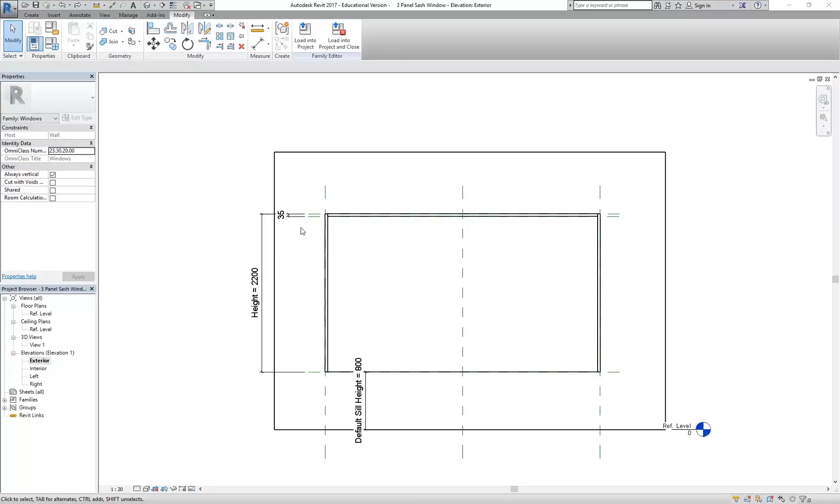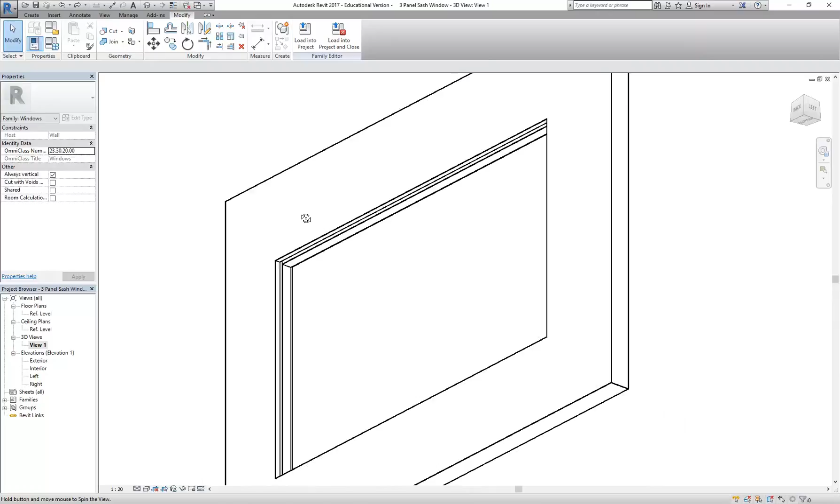Okay, so now I've made the three pieces that are essentially the same, or have the same profile, that is 35 mil in this view by 100 mil that we can see in plan. So the 100 mil is this way. And so looking at them in the 3D view, you can see that they're still reading as separate pieces. If you're worried that they should look like this and read as one piece, don't worry about that. We can make them join together afterwards using the join tool.

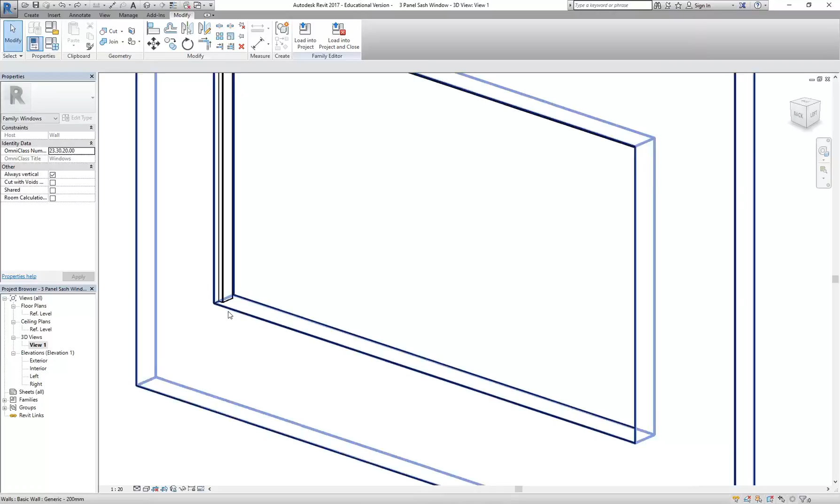But what I want to do next, though, is the sill, or the sill trimmer, or reveal, or trimmer really, and that's going to sit down here and stick out a little bit. I'm going to go back to my reference plane, the ref level floor plan. And you could do this even if you don't have the window head done. Actually, the order really doesn't matter as long as you've got the jambs. So I'm going to make an extrusion.

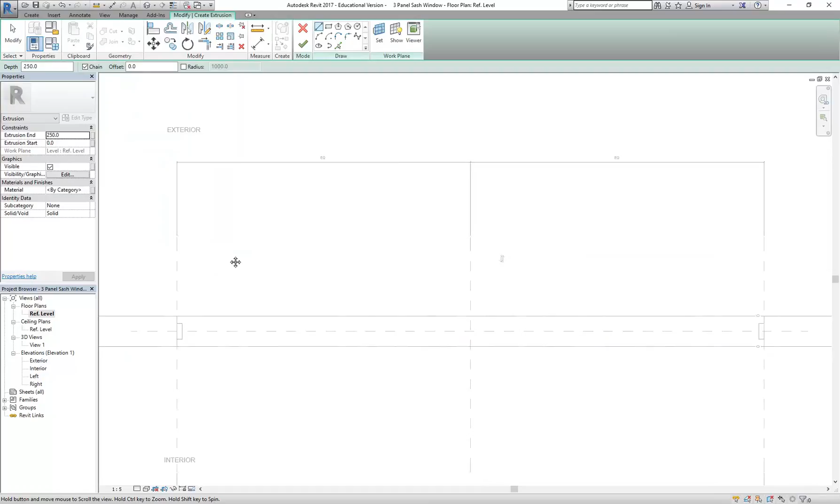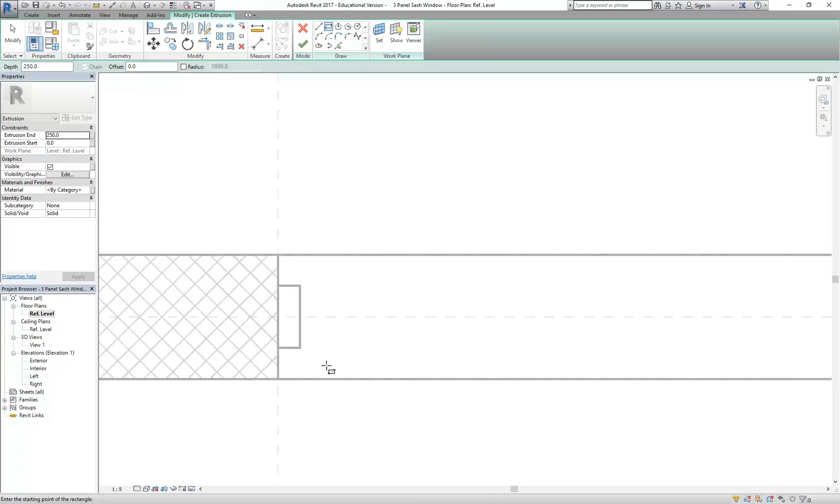And here it's a little bit more complex if you want to do it the right way, and I'm going to try to get you to do things the right way. Now you've got this piece here which really would sit under the window jambs, but I'm just going to make it overlap. So I'm going to draw a rectangle, the same way I did before, by clicking a point inside, and we'll bring over the other side this up and to the right. So again, it's inside the window jambs, just to make my aligning a bit clearer.

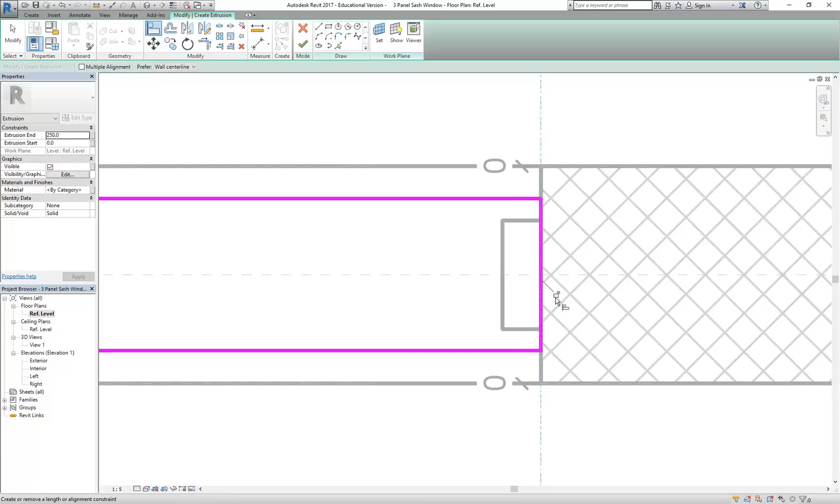So using the align tool, like I said, I'm going to make it overlap the jamb. So this time I'm going to use the reference plane on the side of the opening, and then pick the side of my rectangle, lock it. I'll do the same on the other side. Reference plane, edge of the rectangle, lock.

Now, looking in the plan view, how do we know which is the inside and which is the outside? Exactly, spot on. That's good if you spotted that. So yeah, they do tell you. If you zoom out, you'll see interior and exterior in your plan view. And Revit needs to know that, because you've got to establish which is the inside and which is the outside as you place your windows, because with a sash, for example, like this, the top needs to go on the outside. Or it'll leak, that's right.

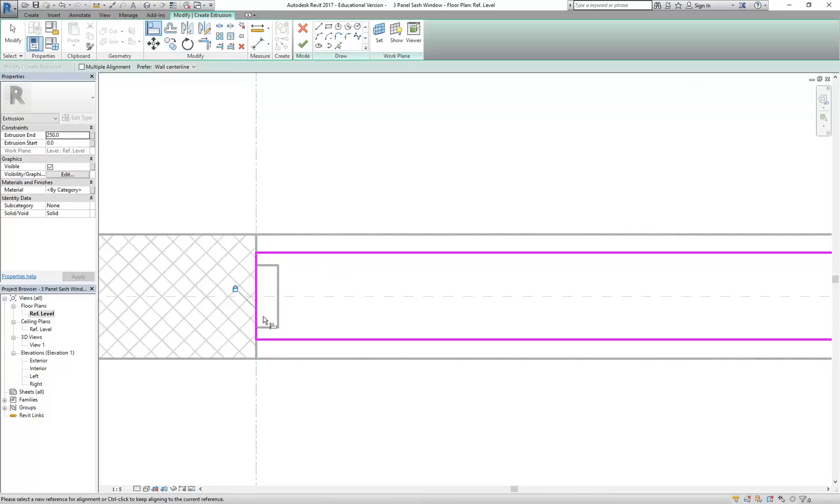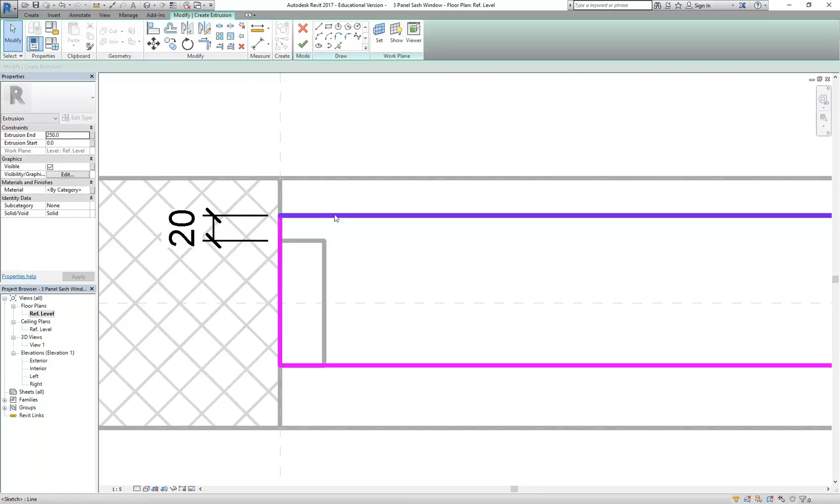So we want the sill to stick out on the exterior side. So I'm going to choose the bottom edge of the jamb and align that exactly. Lock it. But then I'm going to draw a dimension from the window jamb top to the edge of my sill, place it to one side. 20 mil is actually what I wanted, but if you need to change it, you can always select that line and change that dimension. Oh, and it's a bit off anyway, so I'll make it 20 by typing. Tick finish.

And now, sorry, what did I forget? I didn't lock it. So, not a problem. I can always edit extrusion, select the dimension, and then lock. Now, you might find that you forget to lock them, and it should follow that anyway. The locking really is just forcing it to keep that dimension, but usually if you draw a dimension in, it takes precedence over something that doesn't have a dimension.

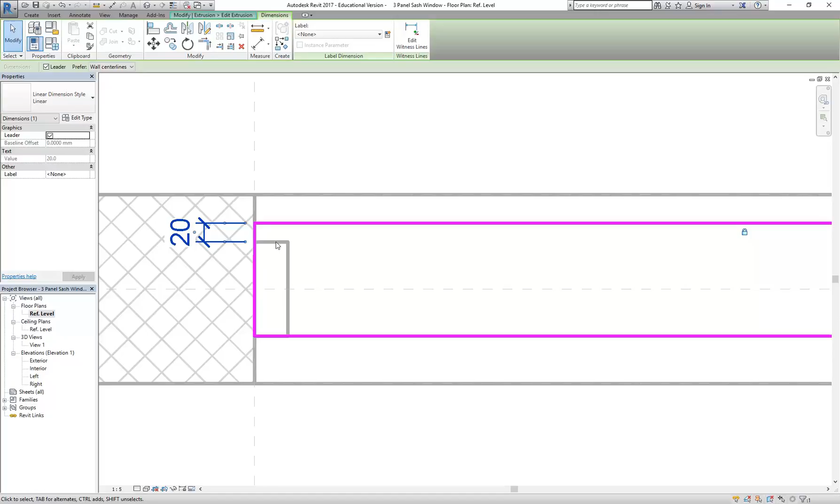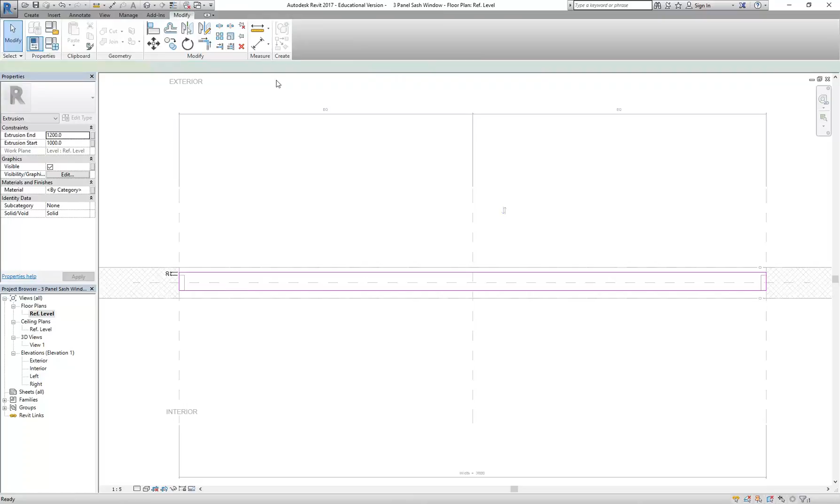So there's my piece, and I will, again, just put in a height in properties there, an extrusion start of, say, 1,000 and an end of, say, 1,200. These are just arbitrary values, so that when I finish it and look in a 3D view or the elevations, I can see it and it's not inside the wall. And then I'm sure you can work out the rest, because it's the same as the head.

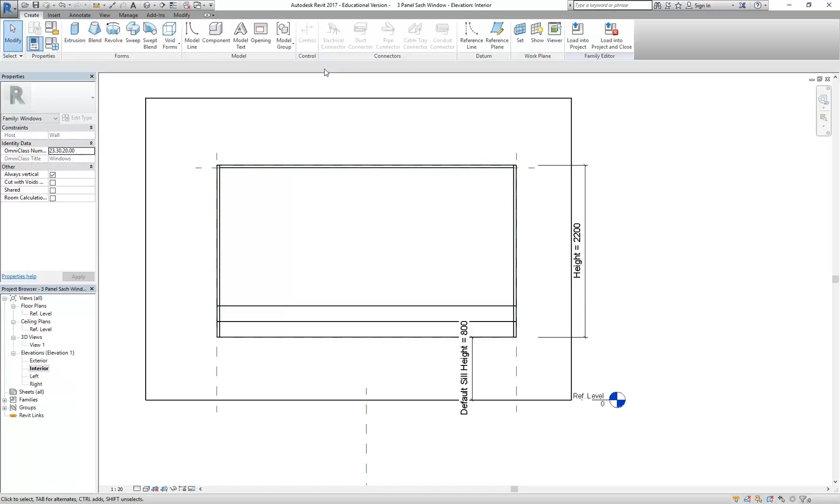I can lock the bottom to the window, but I need a reference plane just like I had up here. I'm going to draw a new reference plane over to the right. Make that, again, 20. Yeah, just because it's... Yeah, exactly. Yep. So you can see it there.

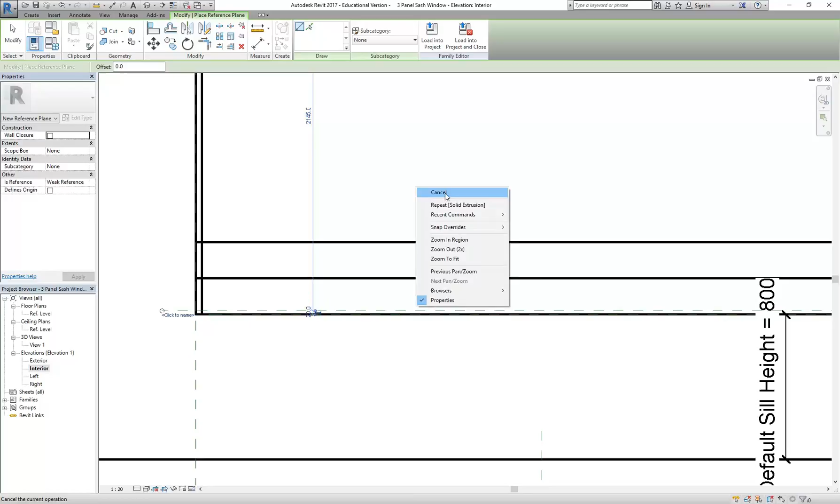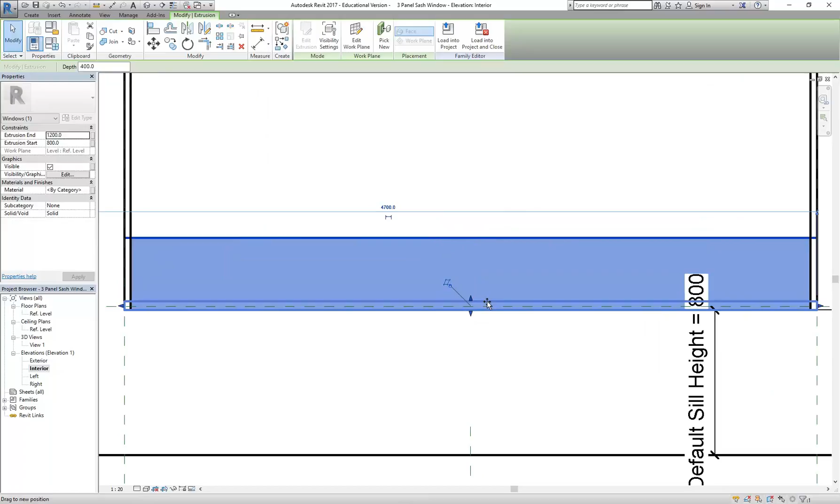Okay, and then, just like before, draw a dimension so that you can lock it. And then all you should need to do is click and drag the arrows on the extrusion to lock it to the edge of your opening, and of course to the reference plane. Lock it. So now go to the 3D view, and you can see there that doesn't look very good.

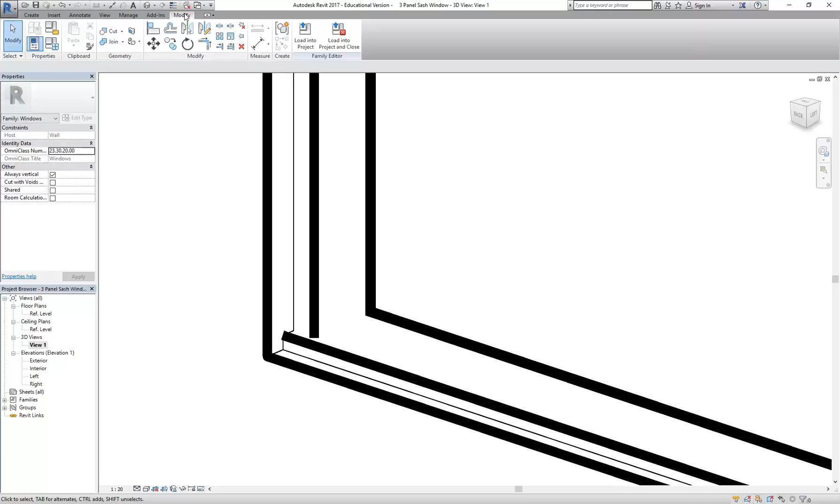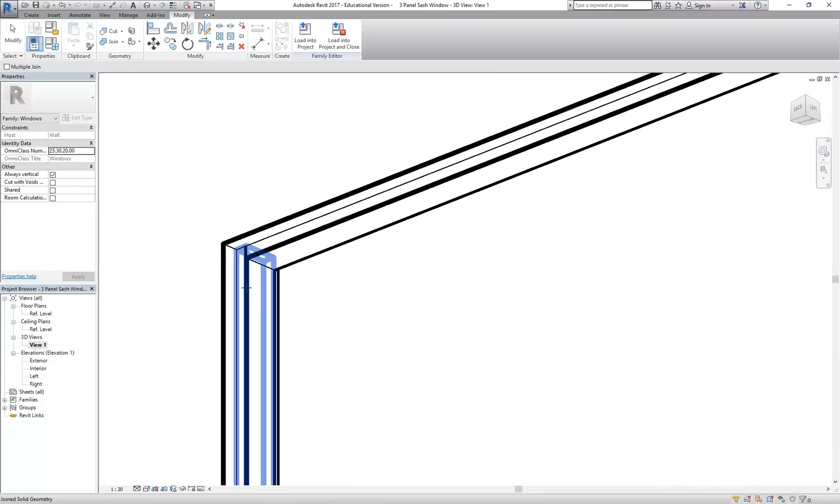So here you really should be looking at using join to clean up the graphics there. So that's what I'm going to do. So I'm going to, on the modify tab, oh yeah, two seconds, I'll come up in a sec. So I'm going to click the join tool, and then select the sill, and then the jamb. You can see that just cleans up all the joins. So same here, sill, and the jamb. And then at the top, we may as well, while we're at it, do the same thing with the jamb and then the head. Over here, it's already picked it up.

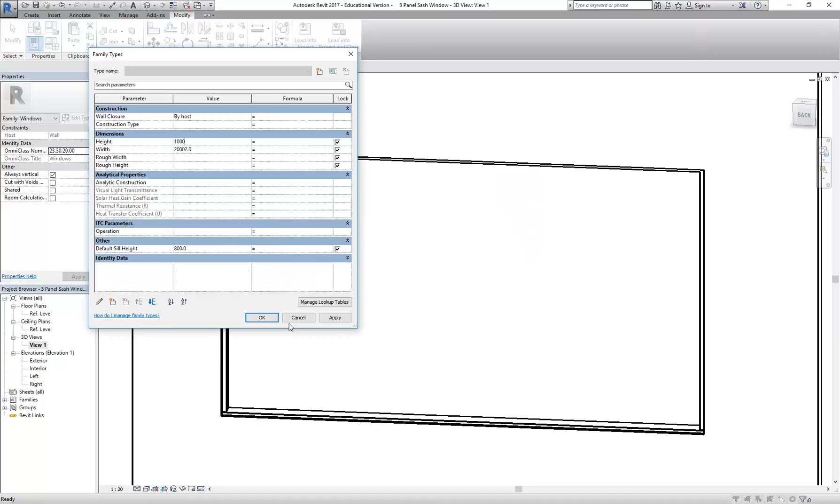So then what's the last thing to make sure it's all still working? Exactly, flexing. So I can flex, in other words, change these dimensions again. So let's try 2000 and 1000. Here we go. Remove constraints. Delete elements. Okay, so we've got a problem. Right, so that didn't work. So I'm going to undo and see where I went wrong.

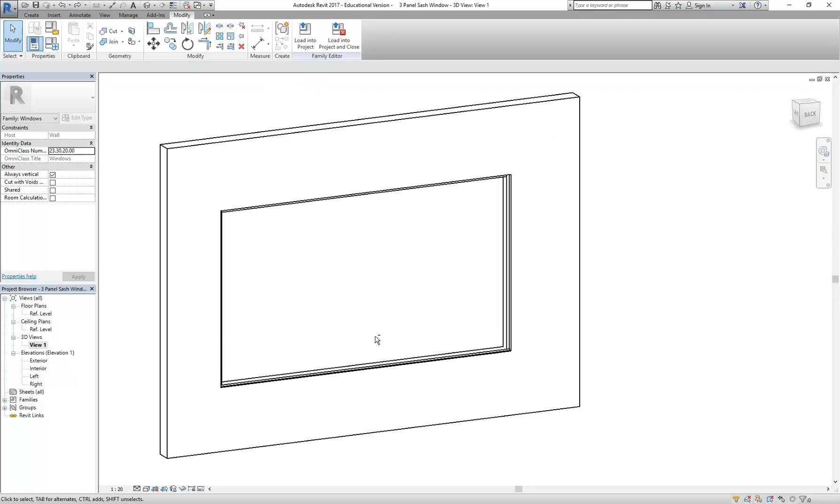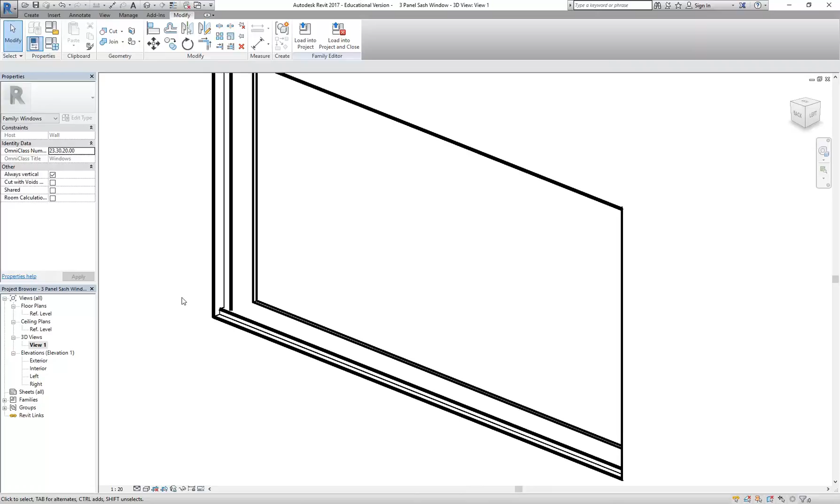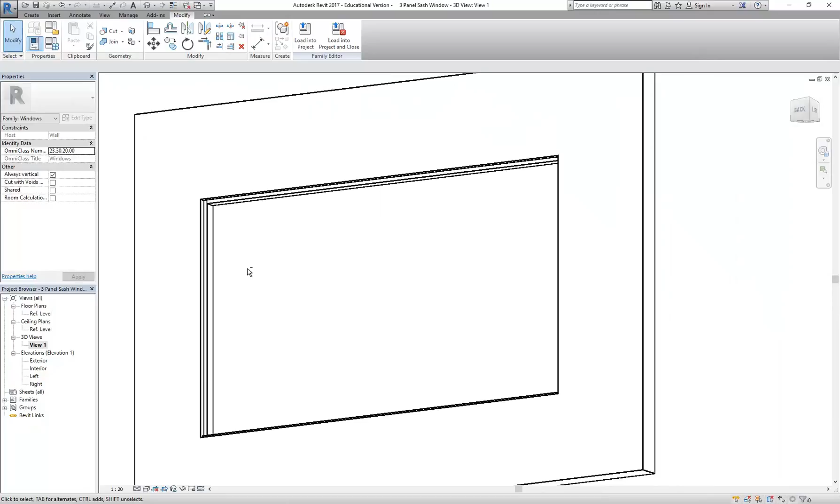So I've just undone the joining, and I'm going to go back and try flexing again. So I'll make that 2000 and 1000. Yep. Okay, so it was okay up until the join. So I'll do the bottom first. Try flexing again. 2200 and 3800. Yep. Okay, so it's up to that point. It's when I try to join the top to the jambs that it's got a problem.

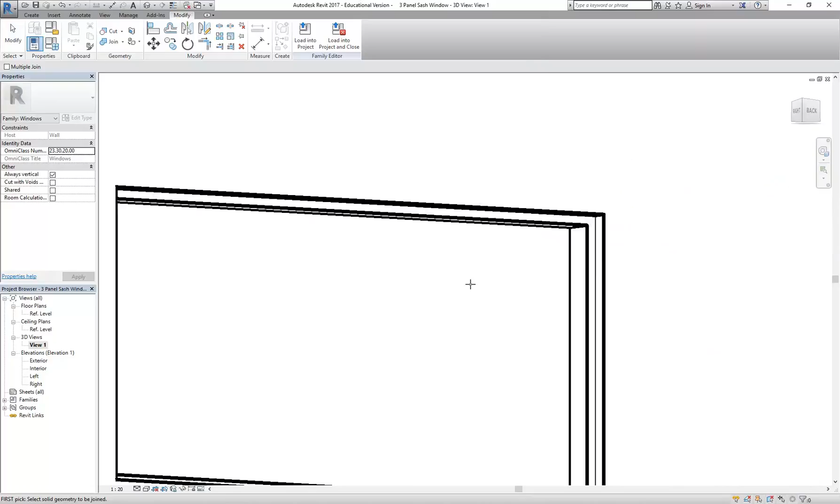So I'll just do that now. Also, I'll just try flexing again now. It may have just been a temporary error, which does happen. Yep, now it's working. Okay, so let's try the join. This is why you need to test it as you go along. So let's see. 3800 and 2200. Oh, now it's working.

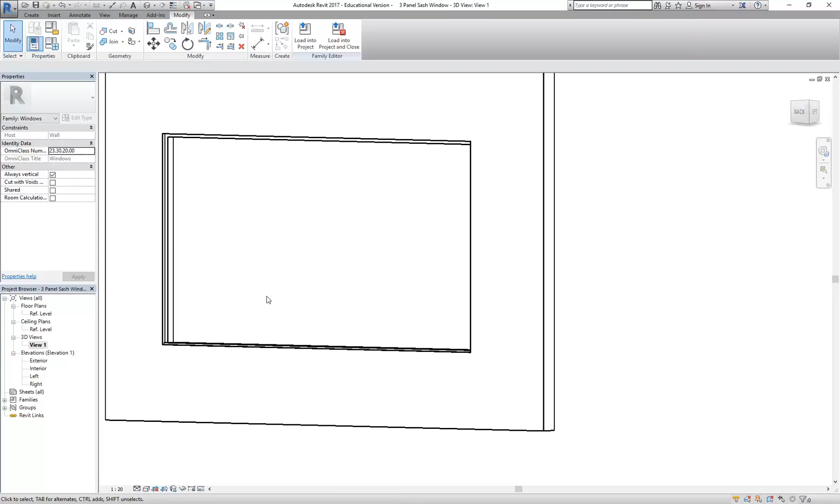That does happen. I don't know why, but again, that's why it's so important to just test it as you go along. Keep coming in and making sure those parameters are working. You'd think in theory it should work if you just do all the work and then leave the testing until the end. But it's the same when you're doing programming or anything like this with software. You really need to check the logic all the way through, and it is easy to just do one step wrong and not realise, and then you'll go too far ahead and realise that the whole thing's broken and you've got to start again from scratch.

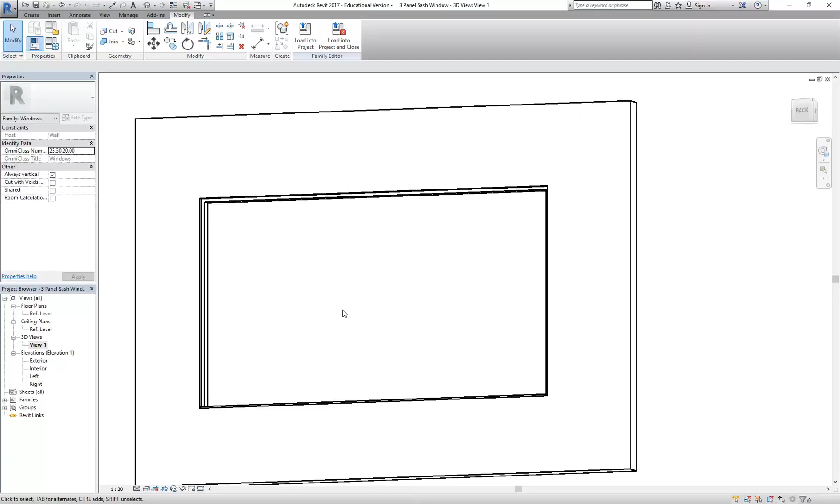Okay, so that's working though. I'll give you some time to do that, and then we'll have a look at the panels.